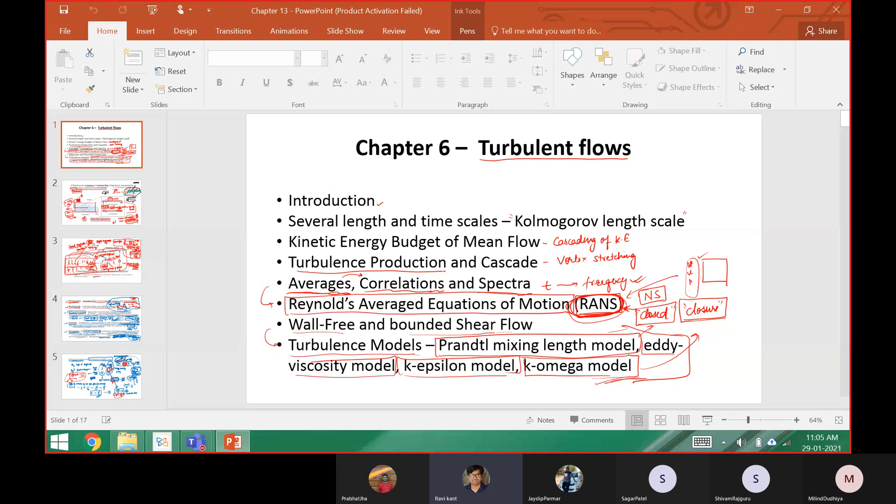So far we have talked about several length scales and time scales in turbulent flows, and the kinetic energy budget, that is the cascading of energy from mean flow towards the viscous dissipation. Vortex stretching we will talk about a bit later. Now we will talk about the averaged quantity.

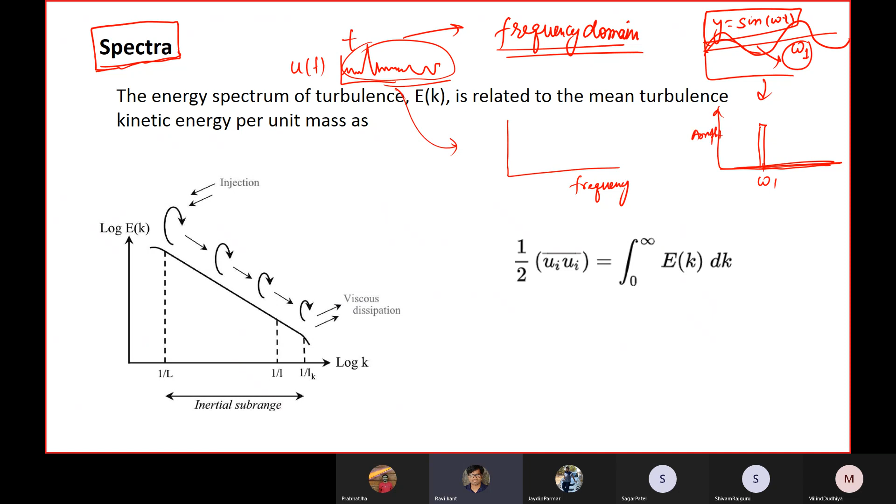I know that y = sin(omega t) has only one frequency, omega, and if I do the spectrum analysis, I will get only omega 1 as one peak, and the rest of the frequencies are 0. So only one frequency I'll get if I transform my sine omega t. Usually in MATLAB we have fast Fourier transform, FFT, in built-in packages. You can directly go and check; you'll get only omega.

And not only this, let's suppose y = a sin(omega 1 t) + b cos(omega 2 t). In this particular wave we have two frequencies, right? So I could expect two frequencies inherited in it. You can analyze things in time at infinite times, but you will be able to analyze things more clearly or in a more advanced way only when you transform this into the frequency spectrum. After transforming this time-domain function, you get not only omega 1; you have two frequencies, and you will get two peaks.

Similarly, if you take random white noise, it has certain features. It goes very vigorously with time, but when you do the frequency transformation on the frequency scale, it actually inherits all omegas from 0 to infinity. It has infinite omegas, so you will get peaks at all the frequencies, unlike sine or cosine waves, which have only one or two frequencies.

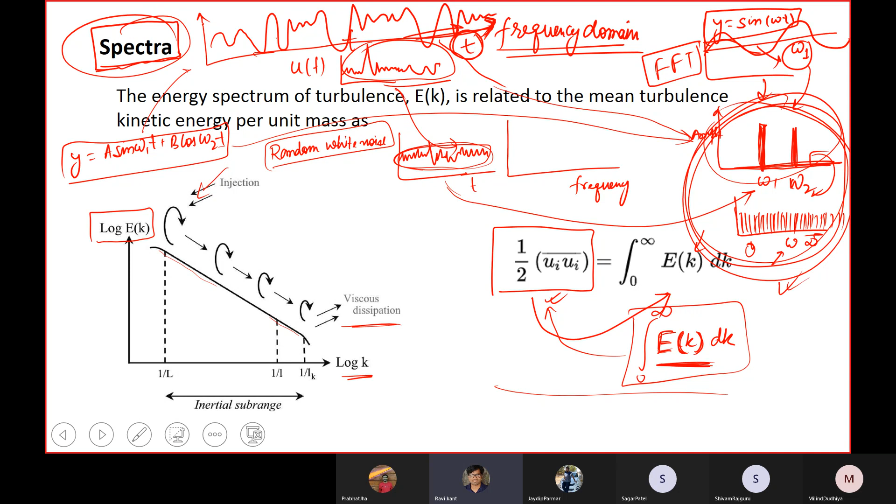Now let us move towards the derivation of the Reynolds-averaged Navier-Stokes equation. To do the averaging of the Navier-Stokes equation, we use something called Reynolds decomposition. Reynolds decomposition tells that any instantaneous quantity can be written in terms of the mean or average quantity plus the fluctuating quantity. Fluctuations are always there and we are more interested in this quantity, because this is why turbulent features come into picture.

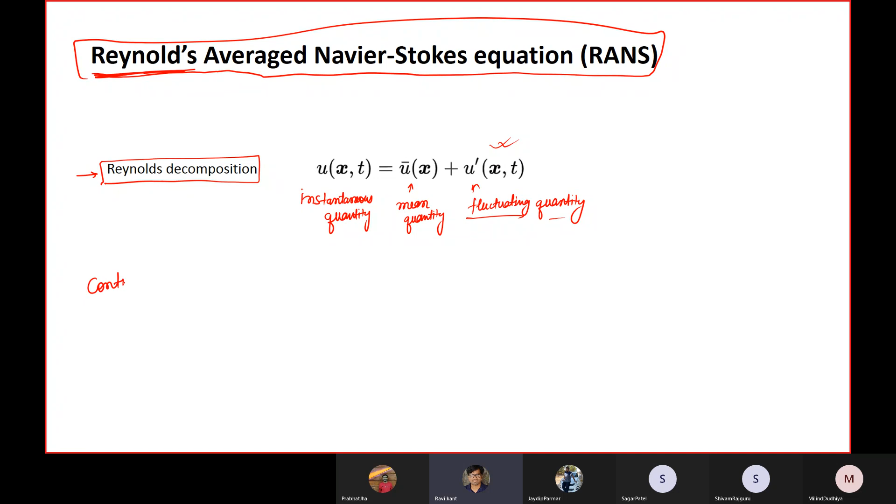So let us first derive the continuity equation, and then we will move to the momentum equation once we understand it. What is my continuity equation? Dou u by dou x plus dou v by dou y plus dou w by dou z. Turbulent flows are purely three-dimensional phenomena, so we cannot neglect anything; we have to take all the components.

So in tensor notation, I can write the continuity equation as dou u_j by dou x_j equals 0. Since j is a repeating index, there is a summation sign hidden here. So this is your continuity equation, and I can write these quantities in tensor notation. This is valid for u, v, w, and p. So the instantaneous u as a function of x and time can be written as mean u.

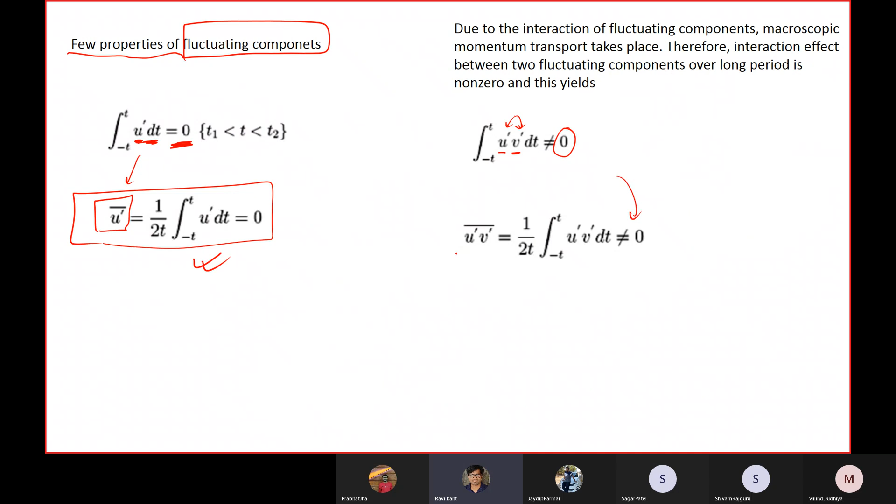I did not talk about the multiplication of two fluctuating variables. It will not be 0. The reason being, they may interact with each other, so averaging of two variables will not give you 0. Due to the interaction of fluctuating components, macroscopic momentum transfer takes place. Therefore, interaction effects between two fluctuating components over a long period of time are non-zero. But single-handedly, averaging a fluctuating component turns out to be 0 statistically.

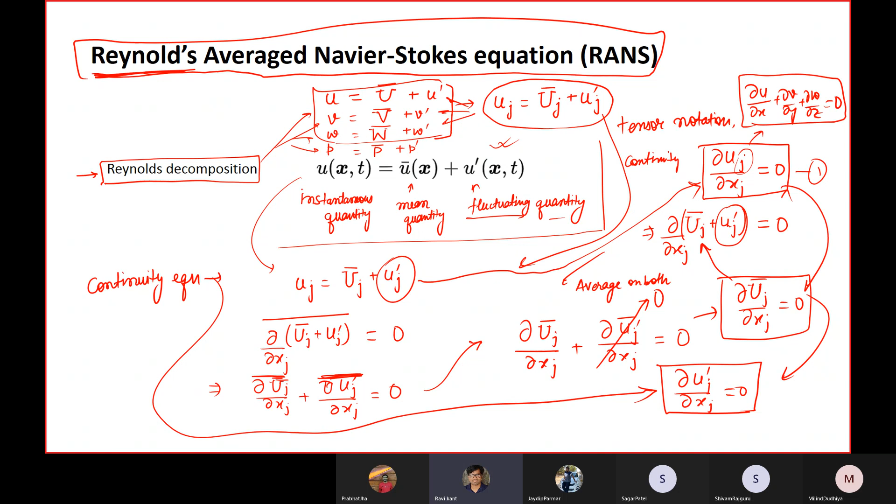So with this identity, I can make this thing 0. So I am left with dou capital Uj by dou xj is equal to 0. We have the instantaneous thing is 0, and the mean thing is 0. With these two equations, since this is 0, you plug it in here, and you get dou u dash j by dou x j is equal to 0, the continuity equation for fluctuating component. So this is first part of Reynolds averaged Navier-Stokes equation.

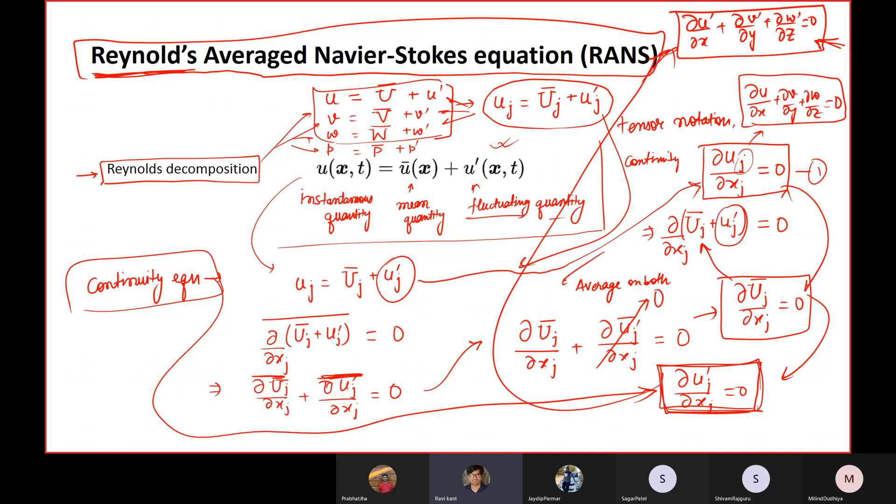One step ahead, I can write the fluctuating quantity dou u dash by dou x plus dou v dash by dou y plus dou w dash by dou z is equal to 0. So the continuity is again valid in fluctuating variables as well. The similar exercise we can do for momentum equation as well.

So let's start with ith momentum equation. Can somebody recall it? Rho times dou ui by dou t plus uj. These are instantaneous quantities, right? Normal u's are instantaneous. Capital U, whenever I write it, is mean flow, and uj dash prime quantities are fluctuating. So this is the set of nomenclatures I will set.

So uj dou ui by dou xj. The advection term is equal to minus dou p by dou xi, plus dou by dou xj of mu times dou ui by dou xj. The usual Navier-Stokes equation.

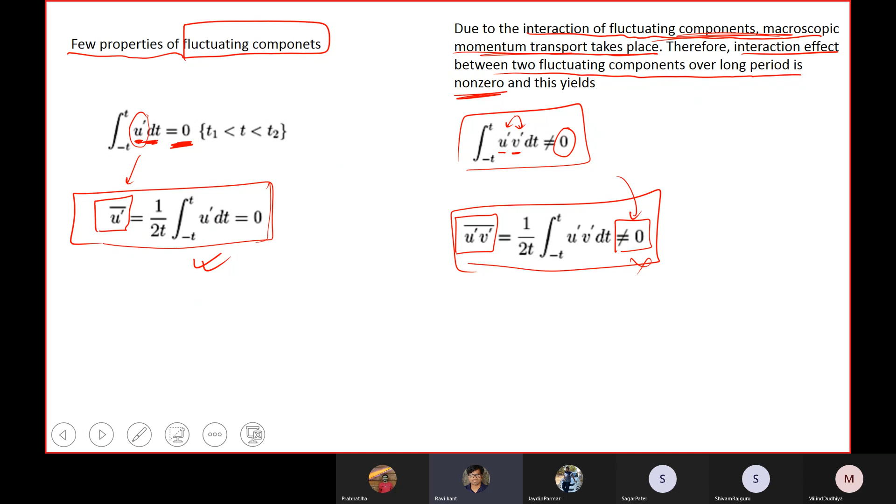Okay, so now rho times this quantity is an additional quantity. So rho times ui dash uj dash bar, and this is not 0. Why is this not 0? Because we have already decided that the multiplication of two independently fluctuating components, if it is multiplied and averaged, will not be 0 because of their macroscopic interactions that take place. Because of this, one term is sitting over there, and minus of this term is called Reynolds stress.

And if you write in terms of matrices, then you should have these many components like u1 dash u1 dash bar, u1 dash u2 dash bar, u1 dash u3 dash bar, u2 dash u1 dash bar. Essentially these two are same, so this is a symmetric matrix. It will form u2 dash u2 dash bar, u2 dash u3 dash bar, and similarly u3 dash u3 dash bar. Since this is symmetric, there are 1, 2, 3, 4, 5 and 6 components. So these 6 additional terms come into picture.